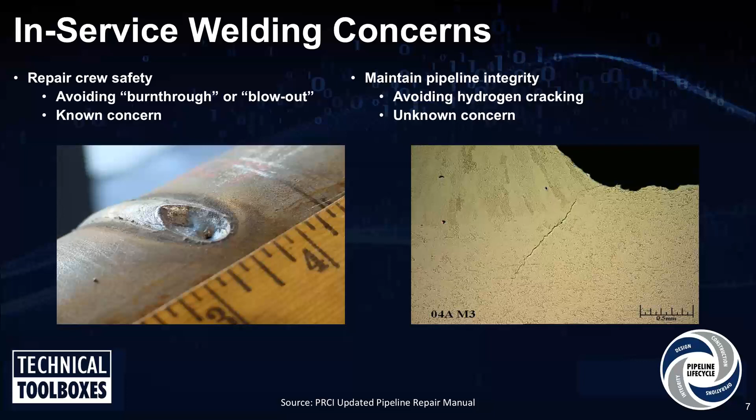So burn through is kind of a little misnomer. In construction girth welding, there is a defect called a burn through, and that happens when a welder is welding the root pass. Depending on the welder technique or maybe the variation in joint, the welding arc force will actually blow the weld pool into the ID of the pipe. So that's typically what a burn through is from a construction standpoint.

Now that same term is used for in-service welding also, but for an in-service welding burn through, the welder doesn't actually blow through the pipe wall. What happens is, as he's welding, the area underneath the liquid weld pool is still solid, but it gets really, really hot. When steel gets hot, steel gets weak. So at some point, that solid piece of steel gets so hot that it loses all its strength, so it just cannot contain the pressure underneath the weld pool.

So what happens is the pressure from the pipeline actually blows out or forces the product out through the weld pool, through that weak steel. You kind of see that on the bottom left picture: you have the weld pool, and directly underneath the weld pool, you see kind of like a dimple in that pipe wall. And that's just the pipe wall local yielding due to the stress of the pressure and the reduced strength of that steel at high temperature.

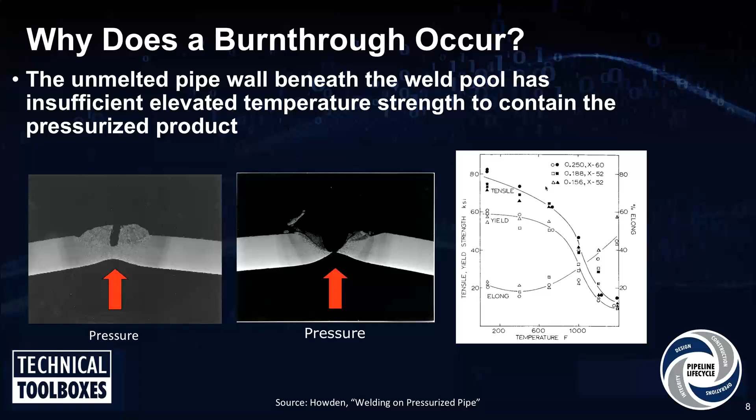And really, when it comes down to burn through, it's a balancing act about how much heat goes in versus how much heat leaves. This is the same balancing act I'm going to talk about with hydrogen cracking, but from a different perspective. From the burn through perspective, we don't want the pipe wall to get so hot that it loses its strength and we burn through. So we want to make sure more heat leaves the weld region than goes into the weld region.

The heat that leaves the weld region leaves through the cooling aspects of the pipeline itself, which is the wall thickness, and also what is in the pipeline and how it flows. The heat going into the weld is directly affected by how the welder welds and what electrode he uses. Right? So if a welder welds hot, or at a high heat input, he's more likely to burn through than a welder that welds at a lower heat input. Now that's one thing I want to clarify too when we talk about welding heat.

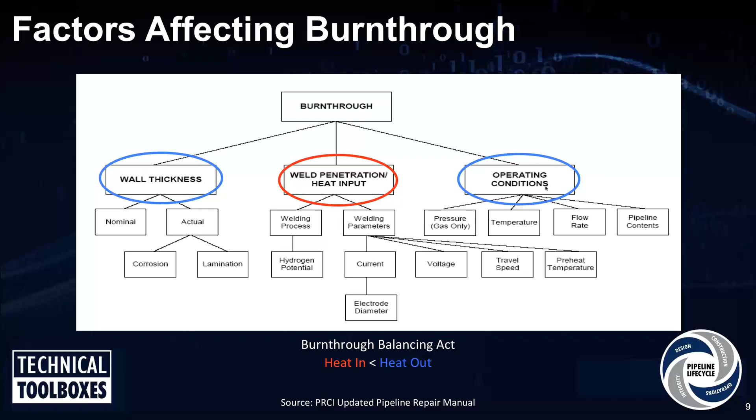So we go to the next slide. So how have companies historically dealt with burn-through risk? Well, one of the more common approaches that companies use is they limit the wall thickness that a welder can weld on. Your typical wall thicknesses are about 188 wall. Some people use 156 wall. But again, wall thickness is just one of the three factors I just talked about.

So yes, you can limit wall thickness, but that could be both a conservative and a non-conservative approach, meaning you can weld on a thinner wall pipe if you can control the other two factors. So you can weld down to 125 wall pipe if you control how hot the welder welds and maybe control the flow rate of what's going through the pipeline.

On the other side, if you have a limit of say 188 wall in your welding manual, a welder might think, well, if I'm welding over 188 wall, I don't have to worry about burning through at all, which is also not the case. Because if the welder welds too hot, you can still burn through pipe over 188 wall. I've seen burn-throughs as thick as a 1/4 inch wall.

Now it's very rare, and typically the welders might be welding a little hotter than they should have been, but it is possible. But again, it goes back to you have to control all the factors to really determine what is an acceptable risk. Well, that's historically how things have been dealt with.

Now, more recently, especially with the development of computers, these thermal analysis models have come to, again, evaluate burn-through risk, but they compare all the factors at once. And what these models do is they predict what is referred to as the inside surface temperature. And an inside surface temperature is the temperature directly under the weld pool, the area that was believed to get the hottest at the time the weld is occurring.

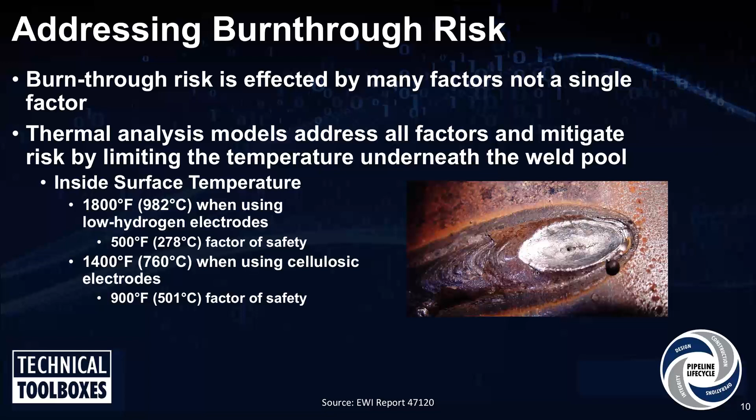All right, so the other aspect again is hydrogen cracking. Now, there's a lot of factors that affect hydrogen cracking, but like burn through risk, there are three primary factors. And those three factors are hydrogen in the weld, a crack susceptible microstructure, and some sort of tensile stress. Now, tensile stress, yes, there are external applied stresses that you have to be worried about, settlement stresses. But one of the big drivers for the tensile stress of in-service welds is just welding residual stress. And you have to accept the fact that you'll have some level of stress. So what most companies do to try to minimize the risk of hydrogen cracking is address the other two factors, which is hydrogen content and microstructure.

Now, the hydrogen that we're worried about is atomic hydrogen. So how do we get atomic hydrogen in our weld? It comes mainly from the welding electrode coating. Again, going back to the low hydrogen and cellulosic electrodes. Low hydrogen obviously has low hydrogen content, and the cellulosic electrode has a dramatic amount of hydrogen in it. And the hydrogen that comes from the welding electrode gets dissociated in the welding arc and gets absorbed by the weld pool. And as the welder travels, that weld pool solidifies. So your weld bead has a certain amount of diffusible hydrogen or atomic hydrogen solidified in the weld bead upon the deposition of that weld. So that's where the hydrogen comes from.

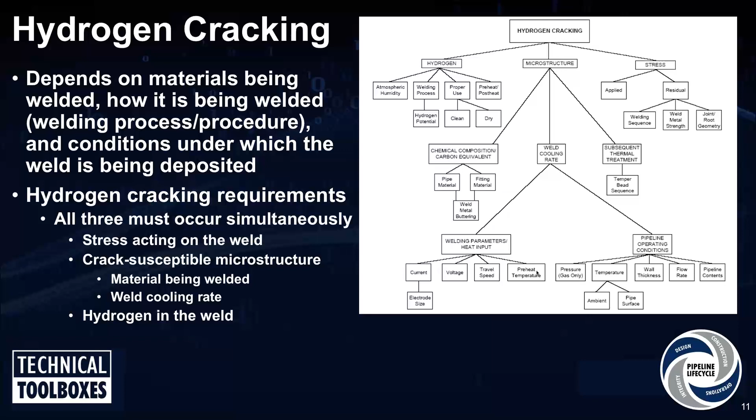So how do we know if we have a crack susceptible microstructure or not? Well, when you qualify welding procedures, you don't really go to evaluate the microstructure of a weld per se. But what you do is you measure the hardness. And the thinking there is crack susceptible microstructures tend to be very hard and very brittle. So if you have a weld heat affected zone that has a high hardness, you suspect that you have a high volume of that microstructure that is crack susceptible.

All right, now, how high of a hardness are we talking about? Well, historically, one of the more common values is 350 Vickers. So the thinking back when that limit was really developed was if you have a weld that was over 350 Vickers, that weld is very crack susceptible. And if you have a hardness under 350, then you don't have to worry about cracking. But in this situation, it's similar to burn through risk and wall thickness. Thinking if you draw a limit, if you're over that limit, you're fine. If you're under, you have a concern.

Well, from a hardness cracking standpoint, yes, you can have this 350 Vickers hardness limit, but you're allowed to have welds that are higher hardness and still acceptable as long as you control the other factors of hydrogen cracking, which is hydrogen content and stress. So if you use low hydrogen welding electrodes, you can have a weld hardness that is over 350 and it still will not crack. And on the other side, if you make welds with cellulosic electrodes, which have quite a large amount of hydrogen, you would have welds that have a hardness below 350, and those welds still might crack.

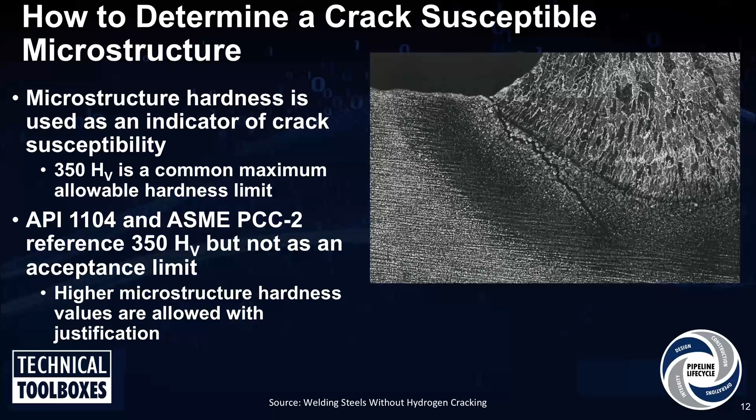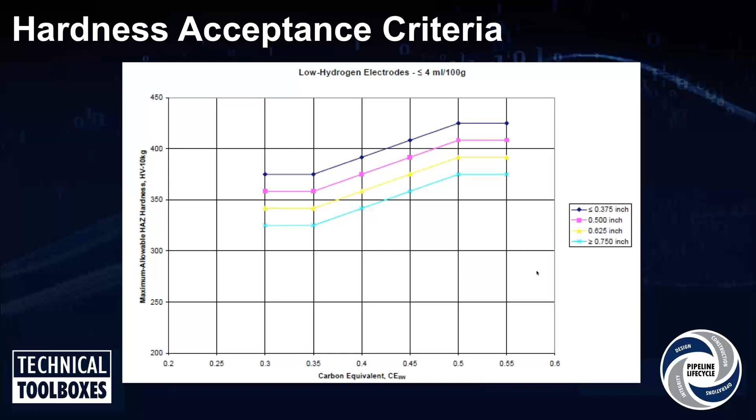So you want to go to the next slide?

So how does this all play into the PRCI model? Well, the PRCI model allows you to model your in-service welding application, right? So it allows you to model whether it's a gas or liquid line, what type of attachment you're putting on, whether it's a sleeve or a branch. You need inputs like diameters, wall thicknesses, test temperatures, what the product type is, flow rates and pressures. Then you input your welding heat inputs, whether it's a welding heat input or your welding parameters.

And it'll go through the heating and cooling, and it'll predict your inside surface temperature. And then it'll also predict your weld cooling rate. And then from your weld cooling rate, the model uses published algorithms to predict what that weld hardness would be.

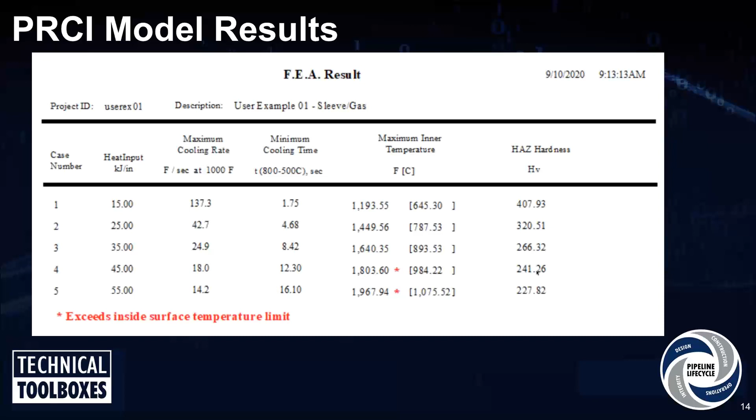And then the last column is the weld hardness, and that's how the model predicts or mitigates the risk of hydrogen cracking. Again, the model predicts your heat affected zone hardnesses, and then you have to compare that to your acceptable limit to determine whether at that welding heat input, that hardness is acceptable. So this is what a typical output screen looks like. Could you go to the next slide, please.

The model also plots your cooling rate to hardness curves. So if your hardness doesn't show up on that table, you don't have to think you have to go back and rerun the models at different heat inputs to try to get your specific hardness limit that you need. You can go back to these plots. And the plot on the bottom predicts your weld hardness versus cooling rate. And the plot on the top predicts your heat input versus cooling rate.

So if you have a specific hardness, say 300 or 400 Vickers, you can use the bottom curve to predict at that 400 Vickers what your cooling rate is, and then use that cooling rate on the top curve to predict what that heat input would be. And that would be the heat input that you need to make that weld to hit that hardness exactly. If you weld at a higher heat input, that weld will cool slower, so your hardness will start reducing.

So typically in an in-service welding situation, from a cracking perspective, what you have is a minimum welding heat input. So as long as you weld above the minimum welding heat input, you know that that weld will have a less hard microstructure. And on the flip side, from a burn through perspective, if you have a risk of burning through, how you mitigate that risk is applying a maximum welding heat input. So then in those situations, the welder has to be able to maintain his weld above a minimum value and below a maximum value.